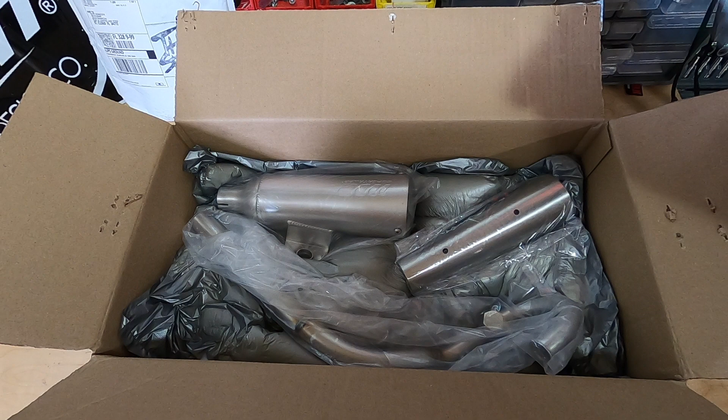Alright, so let's get this box open and see what's inside, even though we know it is the Supertrapp exhaust for the Honda Monkey. Packaged well, which of course is what you want when you get an exhaust. And we see that is clearly the heat shield, we'll put that over there. This is the megaphone style pipe, muffler, silencer, however you want to call it, put that over here. And we have the header pipe.

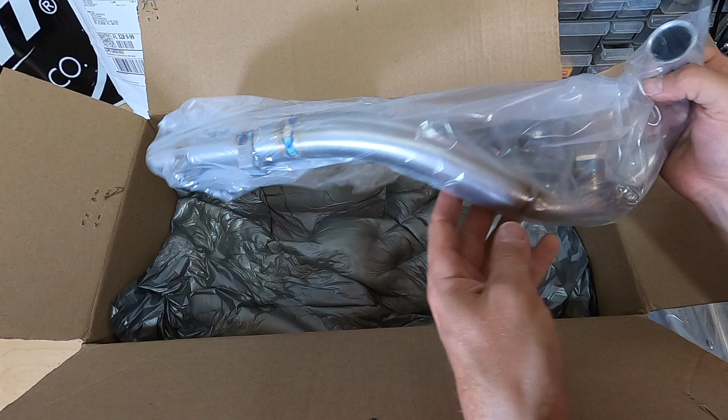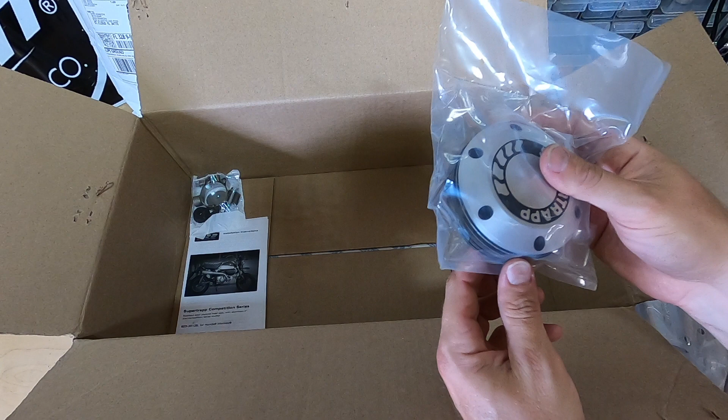Looks like it's got the step design. We'll check it out more when we get it out of the packaging. And got some stuff hiding down here. There's the patented tunable discs, so that's going to be fun, like tuning and tinkering. And we have our hardware package, and we have our instruction manual. Okay, so let's get these things out of the packaging and check them out a little bit better.

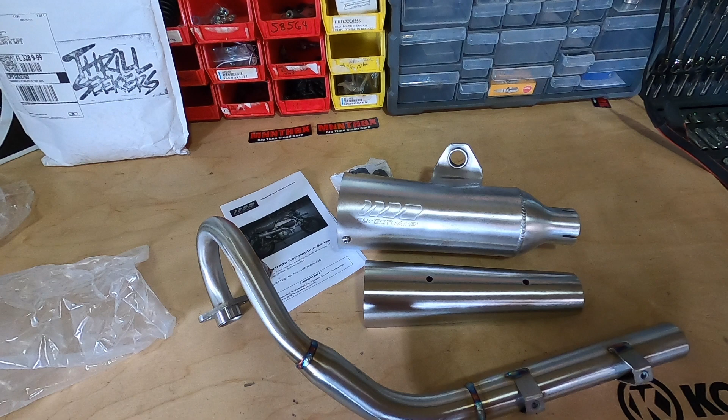We're going to leave this in the package because there's a lot of parts and pieces in there that I don't really need right away. We'll cover those when we get to installing it.

We can tell that this is a really nice, bright, polished stainless steel system. It's got the O2 sensor bung in it already, a nice thick flange, and the pipe's got a nice little flare in it. Here, there's a spacer.

What we're going to do a little bit different than before is measure the diameters of this system. I have a friend named Rodney Sargent who has been asking me on all these exhaust systems what the diameter of the pipe is, and I never thought to measure it. So we're going to do that.

As you can see, it's got some visible welds on it, and some pretty interesting heat soaking going on, which is always cool to see. Pretty standard fare, nothing crazy with the finish, got a nice bright look to it.

And here's the heat shield. It's basically a nice formed piece of stainless steel as well. It's not chrome, but more like a brushed aluminum finish—not shiny chrome, but a dull yet bright aluminum look.

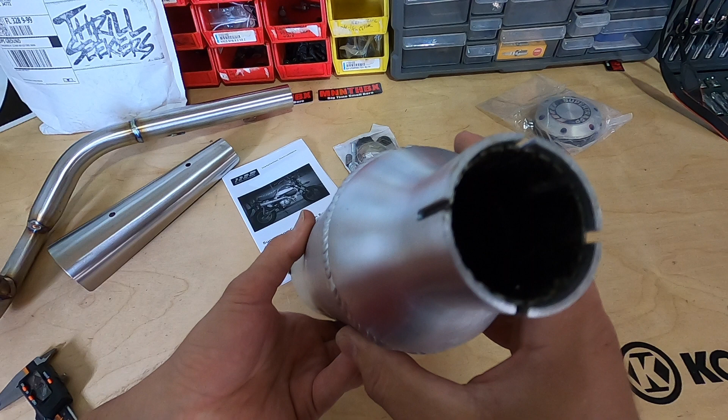Looking in the pipe here, this has a perforated core, much like all the other exhaust systems, but it's straight through—there's no baffling, just packing. Being a little bit bigger and fatter and round, I think this might be a bit more of a muffled sound than the other systems, but that's just my assumption. Haven't had it on the bike yet, so we can't tell.

It says U.S. Forestry Service approved—spark arrestor T100 or 102 requires closed end cap. That's the part we put on the back. So when you have the tunable discs on there, that is spark arrestor approved according to the U.S. government.

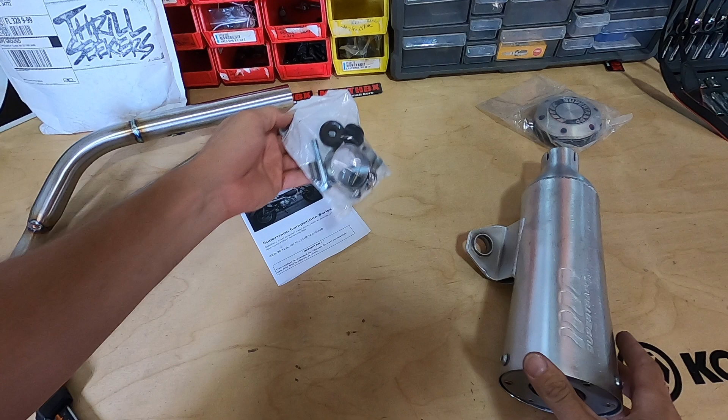So we have the hardware kit. No need to open that right now, but these are just the pieces you're going to need to put it on the bike. Not getting into this, we can see these are the tunable discs.

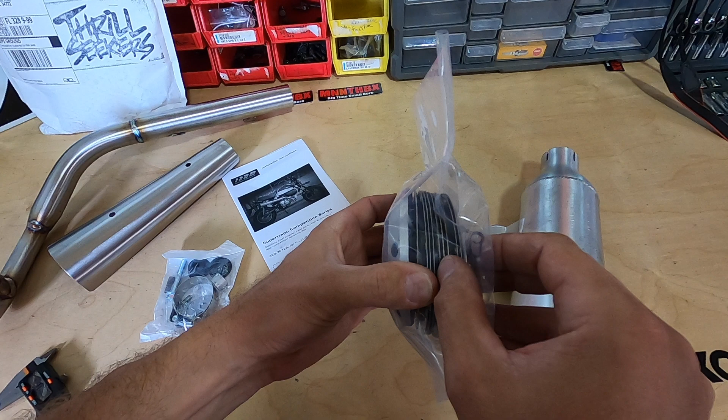It looks like there's a little instruction sheet in there and some anti-seize, and let's count the discs: 1, 2, 3, 4, 5, 6, 7, 8, 9 discs, plus an end cap.

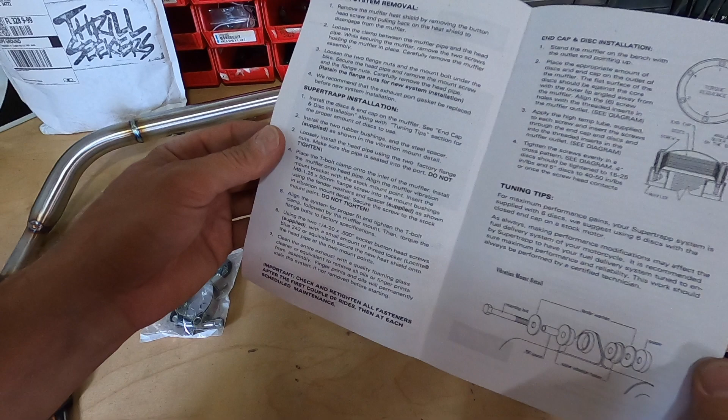We'll get into the instructions when we install it, covering what those discs actually mean and how you can tune your bike using them. There's the instructions, a good look at the tunable disc, a torque sequence, and then tuning tips.

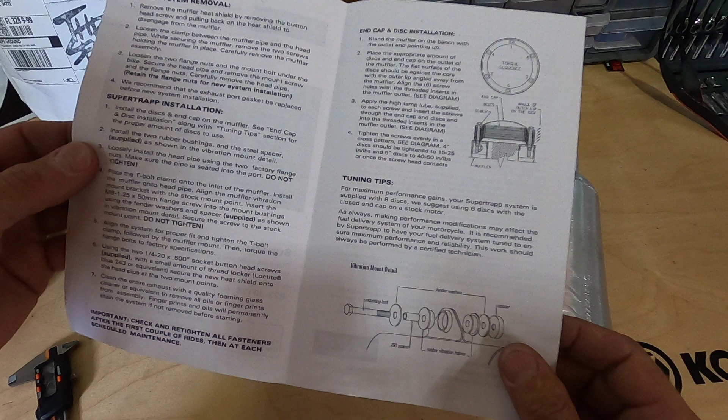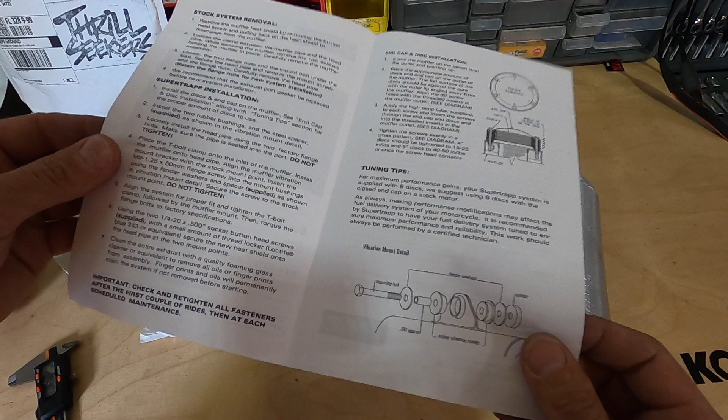For maximum performance gains, your Supertrapp system is supplied with 8 discs. We suggest using 6 with the closed end cap on a stock motor—that's kind of interesting. We're not entirely stock, but we're not too modified.

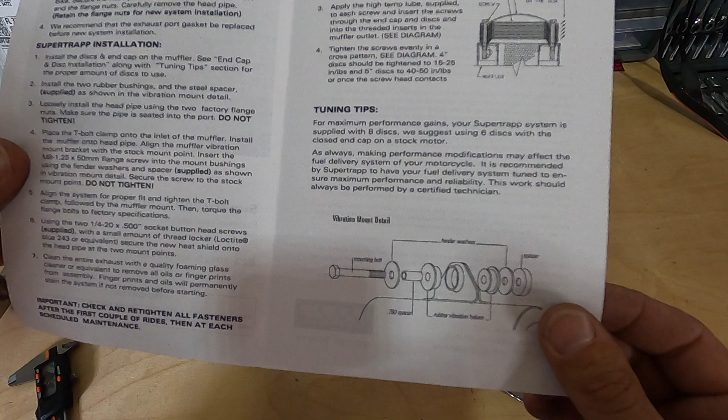As always, making performance modifications may affect the fuel delivery system of your motorcycle. It's recommended by Supertrapp to have your fuel delivery system tuned to ensure maximum performance and reliability, and this work should always be performed by a certified technician. A big question in the monkey community is, if I install an exhaust, do I need to have my ECU retuned? The answer is no, not necessarily—you do not need to have it retuned.

Basically, the bike will not run too lean if you just do the exhaust, but if you do an exhaust and an intake, it might run a little too lean. If you want maximum performance out of your increased flow, it's always advisable to tune your ECU to support that. Whether that's worth it on just an exhaust upgrade, I couldn't say, but it's probably worth looking into, because more airflow through the motor will pick up a little horsepower no matter what.

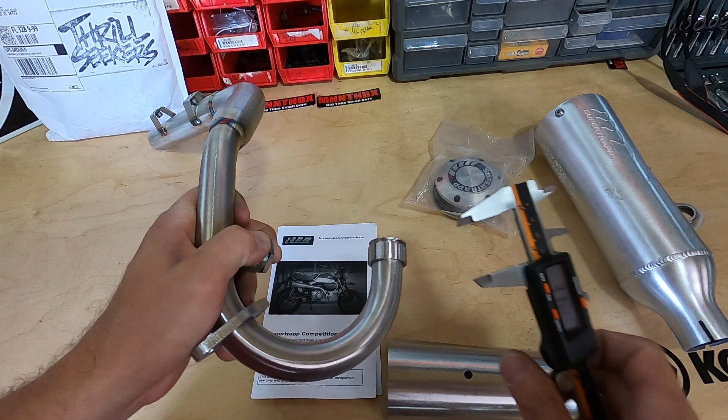Alright, so now we're going to measure this system. We'll do this in millimeters—this caliper gets a little exact with imperial measurements, so millimeters are just easier. It starts again at 24 millimeters.

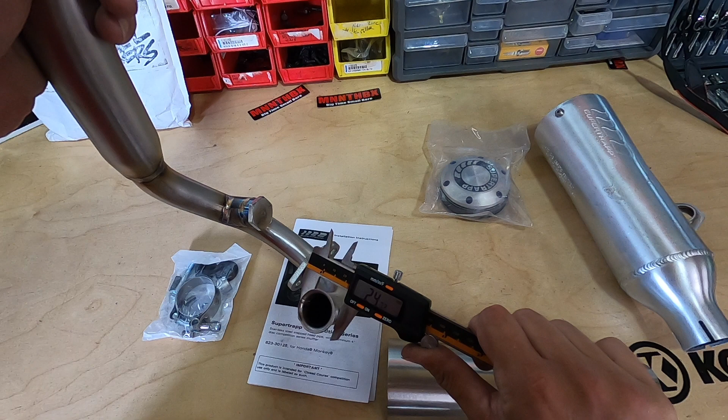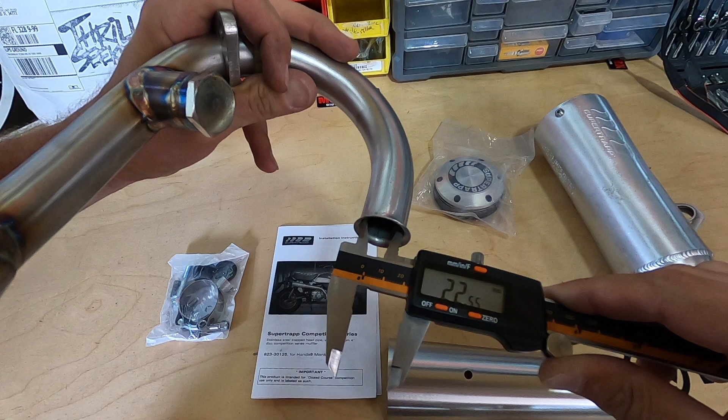Then it goes to 35, then to 38. The inside diameter is 22.5. That step design is something I've seen in most of these Monkey exhausts, and that's to aid airflow. When you step an exhaust system like that, the air picks up speed as it goes into that next size of pipe, and that's pretty common. You see that a lot with small block V8s. They have stepped headers, and it's just to aid in the speed of the exhaust and gas flow going through it.

So pretty common on these systems, but those are the measurements for those out there like Rodney who are building power in their bikes and want to know how big these pipes are. Because some of these builds, especially big bore kits, your needs of the motor start dictating a bit bigger of an exhaust, and some of the off-the-shelf exhausts might not be big enough.

So with that, hopefully that helps you understand how big these pipes are. I'm going to be doing another video where I measure the other pipes I have as well, including the Yoshimura, the Termignoni, and also the TB parts pipe. So we're going to do measurement comparisons from here on out. I'm going to try to catch up on the pipes I've done before - I still have them, so we can get a comparison from now on.

Okay, so I hope you enjoyed that brief history on the Supertrapp exhaust, the look around, and the unbox.